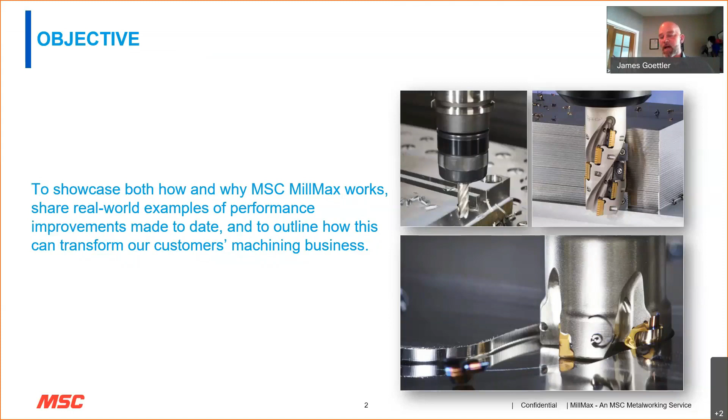So the objective, as I said, is to showcase just how and why MSC MillMax works. We're going to share some real-world examples of performance improvements, a couple of them individually, but also in aggregate, and outline how this is transforming businesses just like yours.

It's the ability to withstand pricing and margin compression, or to improve profitability of your business. So if you're more profitable, you can be more competitive because of your cost position. That allows you to withstand the pricing and margin compression maybe put on you by your customers, but it also allows you to potentially look to reshore supply chains from overseas, putting the U.S. in a position to have a more independent supply chain, as well as the overall profitability of your business.

The second thing is that businesses like yours want to grow year over year, and there are really two ways to do that in manufacturing. One is, if it's a machine shop, whether it's a job shop or a production shop, you can go buy more equipment. If you have the floor space and you have the capital, you can go buy more equipment, and by virtue of having more equipment, you can make more parts. Pretty simple. The other way to do it is to improve the productivity of your workforce, but also the capacity and how much you're running through these pieces of equipment.

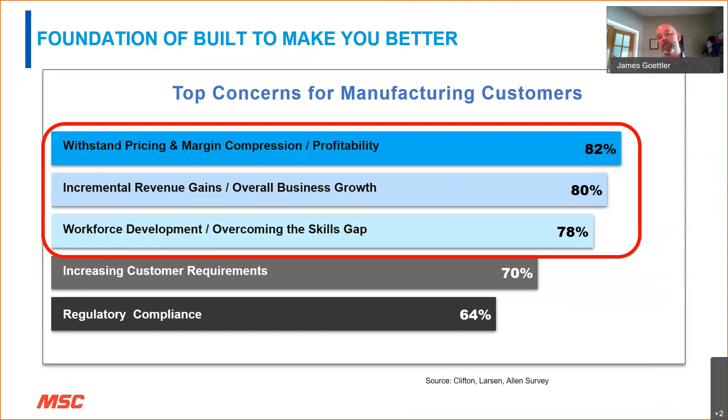So can we improve our profitability, our competitive nature as a machining business, and grow year on year, but do so in the face of this challenge of having skilled workers out there. So what we do at MSC is really focus on those things and try to find ways to help you in those regards. And the same thing falls in line here in the innovation team.

Those findings were released in this executive order, and the challenge was for manufacturing leadership in America to find a way to improve in these regards, through training and through technology and innovation.

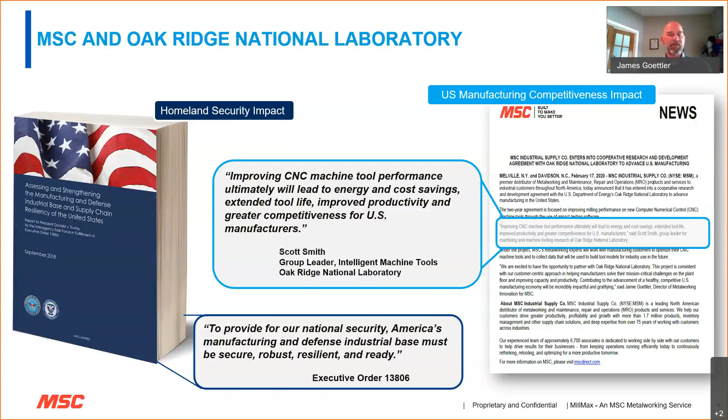Similarly, as I just outlined, for manufacturing businesses, those same things mean better parts, more accurate parts, overcoming the skills gap, using artificial intelligence, using Industry 4.0 endeavors, being more productive, and that also helps our customers become more prosperous and productive. So it's interesting that the same things we're trying to accomplish with MillMax have somewhat of a nationalistic endeavor in helping address that executive order, but also help our customers become better.

The relationship with Oak Ridge has been fruitful, and it'll continue to be for MSC and ultimately for our customers. You can read some of the details of it. It's a pretty interesting story. It was on the cover of Modern Machine Shop back in October of 2020. I invite you to read it. It's a really great story, and it outlines some of the things we'll share today and maybe even further details.

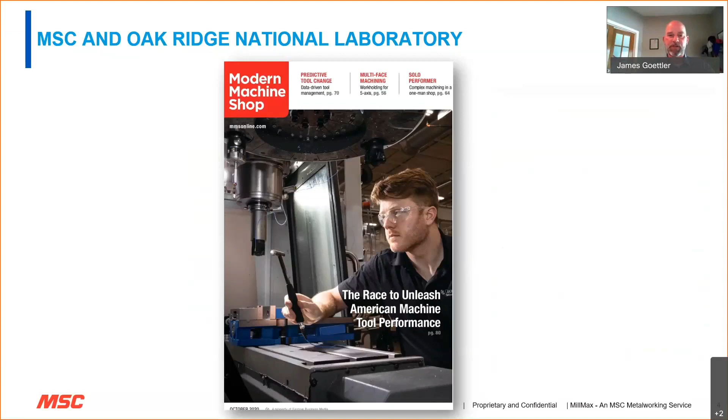So from a national and commercial strategy standpoint, some of the things we're seeing with MillMax are as follows. We're finding a higher material removal rate. Later in the presentation I'm going to share with you what some of those metrics look like, and they're pretty jaw-dropping metrics that MillMax is offering up in terms of these improvements.

Faster setup. We can include faster setup to mean less scrap, knowing instead of guessing in terms of your speeds and feeds and how you'll operate these milling tools on that piece of equipment for that particular material. And potentially programming too, knowing what cutting strategy - is it a full slot, is it a profile cut, is it ramping, is it trochoidal milling? It could be any of these different choices, and you'll know at the outset the ideal strategy. So faster setup is certainly within reason.

Greater capacity. We're finding significant cycle time reductions on average in all materials. Longer tool life is in a lot of cases a byproduct of us helping eliminate chatter from the milling operations you encounter. And as I said, that knowing, not guessing, is saving critical hours of getting more jobs on the machine and not scrapping parts.

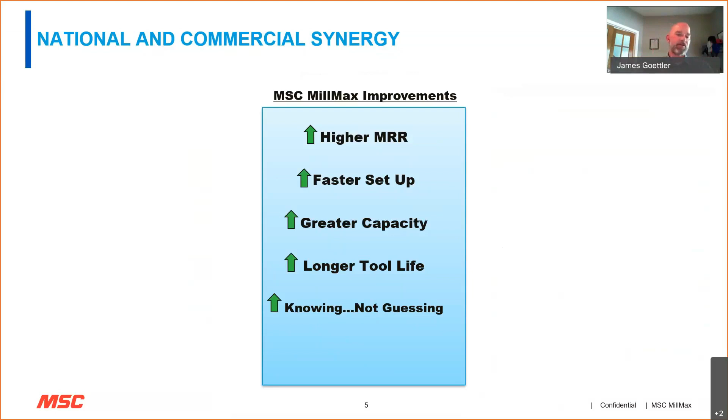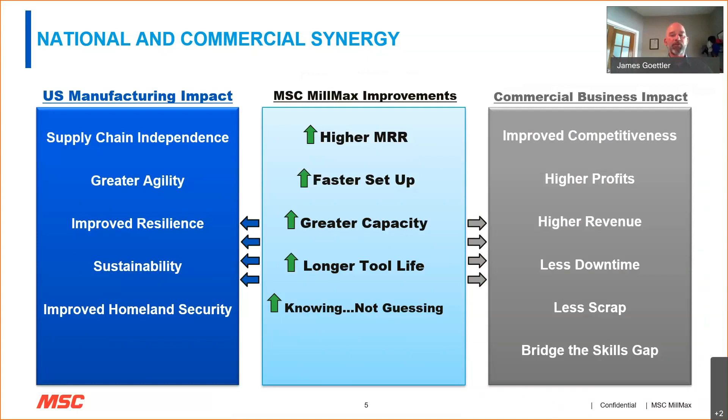So for that manufacturing impact for the United States: supply chain independence, greater agility, improved resilience, sustainability, lower energy usage, quite frankly if you're getting it right the first time, and improved homeland security. But those same things are also improving competitiveness, higher profits, higher revenue, less downtime, less scrap, bridging the skills gap. So that's why with MillMax, we couldn't be more proud to introduce this kind of product into United States businesses and to our customers.

So let's talk about chatter. MillMax is definitely in the business of dealing with situations where customers' operations either will be chattering or potentially are currently in a chatter situation. What we know is that vibration matters in any type of machining, but in milling more so, because the physics of milling would show you that a cutting tool or milling tool has multiple teeth.

Some are in the cut and some are not. Now drilling has multiple flutes, but they're all engaged all the time. In milling, that's not necessarily the case, and because of that you have deflection that happens - we're going to see that in a moment. But even if we just look at a spindle of your machine and tap that, and I'll show you how that works here in a moment with the MillMax video - if we were to tap just the spindle of your machine, of course it's going to vibrate a little bit, and you wouldn't be able to see it with the naked eye, but it can be detected.

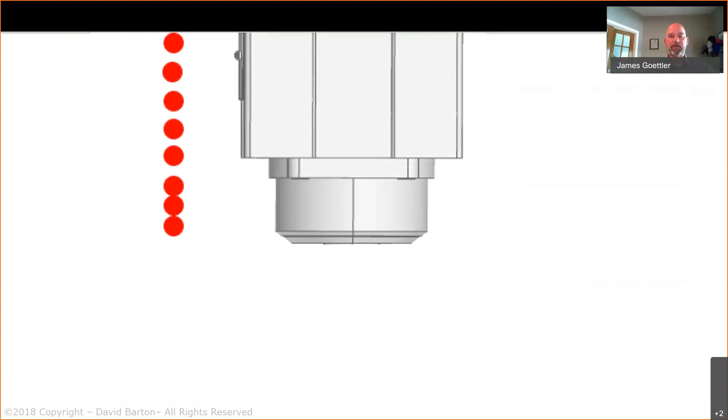You add a holder for an end mill or a face mill or a shell mill, and that would vibrate at a different frequency, but they're connected. So now you've got to deal with multiple frequencies happening. Now you add a cutting tool to the mix, and the ability for those things to find the stable speeds is very difficult. Today it requires trial and error, as I mentioned, in order to identify how this system of a spindle, a tool, and a tool holder wants to run in conjunction with one another. I use the analogy from time to time of a washing machine on a spin cycle.

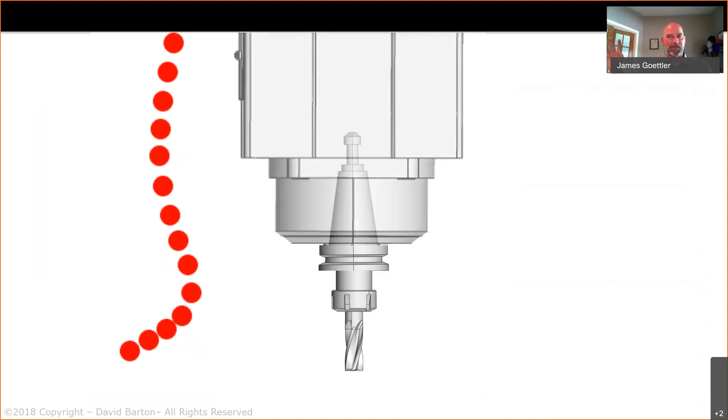Sometimes the load within the container is balanced, but you hear that rattling. It's essentially chatter, essentially vibration happening because it's not a stable speed at a certain RPM. But then it goes faster and faster, and it kind of goes away. Maybe a little bit faster, it seems to come back a little. You want to get up and go fix the washing machine, but then it ends up being fine. In a lot of cases, it's just like this milling setup, where some speeds are stable and some are not. Ceiling fans would be another example, or a rattle as you're driving your vehicle in some cases. Same kind of notion.

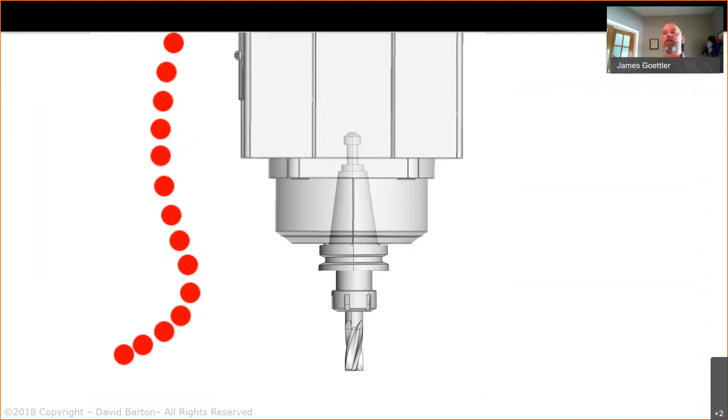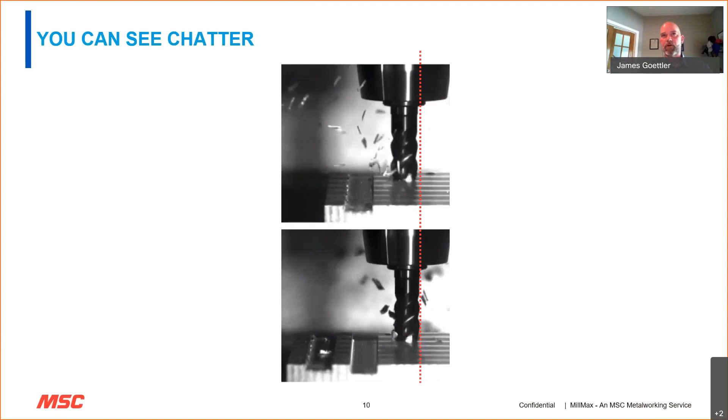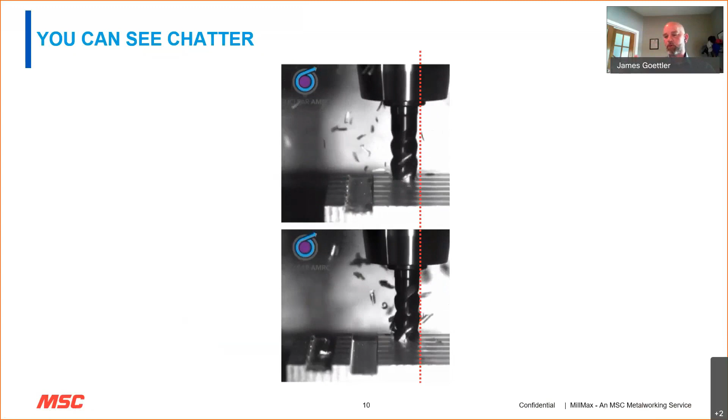As a result, you're going to have bad workpiece finishes, substandard tool life, and depending on how much of the spindle load is being taken on, it can run roughshod on the spindle and its life. The bottom one, shortly after being tapped using MSC MillMax, shows a much more stable cut, consistent chip formation, and that's what you want. With that being the case: longer tool life, better surface finishes, less scrap, less wear and tear on the machines, and in the overwhelming majority of cases, much faster.

Obviously, surface finish comes into play in a big way when it comes to chatter versus not chatter. Our ability to identify how to help you eliminate chatter from your milling operations plays a role in a significant amount of different improvements for your organization.

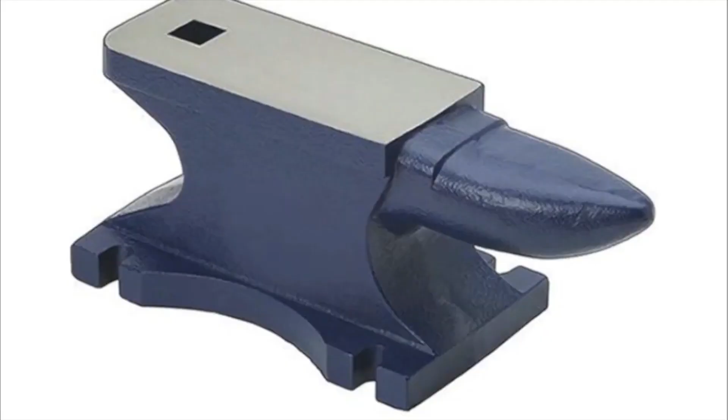We don't make milling machines, milling tools, or milling software. We just make them all mill better. Here's how. Unlike other machining operations, where the cutting edge never leaves the workpiece, milling has hundreds of individual tooth impacts per second, generating forces that cause deflection and vibrations. Like this 75-pound anvil, every tool is flexible and vibrates at its own unique frequency.

So right off the bat, we're showing you here what you can expect from a MillMax visit or consultation, as we call it. What you have here is what's called an instrumented hammer. There's a cable on the bottom side of that hammer that's attached to our metalworking specialist's laptop. This plastic tip on the hammer ensures there's no damage placed on the tool, and we're going to tap that tool strategically a few times in the X direction and a few times in the Y axis. The computer will tell us whether it captured and was able to measure the amount of pounds per square inch we struck that tool with. We're capturing the vibration of that system using this accelerometer, and you can see the cable there that's also attached to that same laptop.

While we're doing that, essentially what's happening is, if it's me applying this pressure to the tool, it's saying, okay, Jamie hits the tool this hard, and when he does, this system vibrates this much. And it allows us to identify through that vibration and measurement what are the stable speeds that this system, this tool, in this holder, looks like obviously a shrink fit holder, in this spindle of this machine, how do they want to run in conjunction with one another?

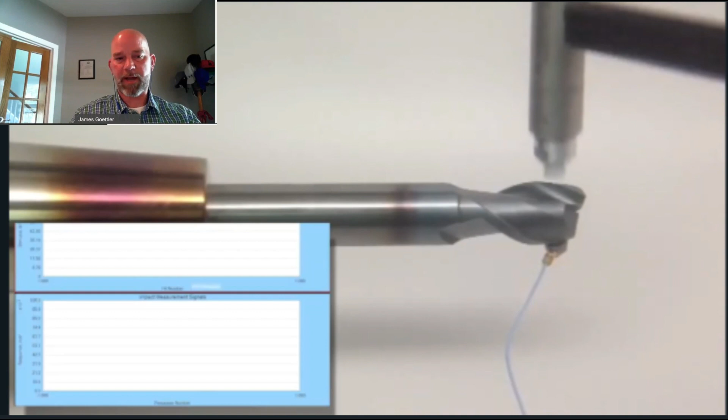Why is this important? The tool point deflects and rebounds at a frequency determined by the flexibility of the tool holder and spindle. You also have the tool impact frequency determined by the number of teeth and spindle speed. You have to get the timing of these two frequencies just right. If you do, each tooth is cutting equally, so tool life, productivity, and quality are maximized.

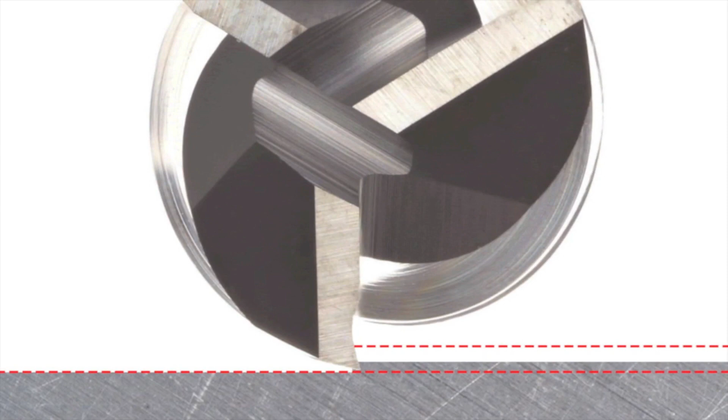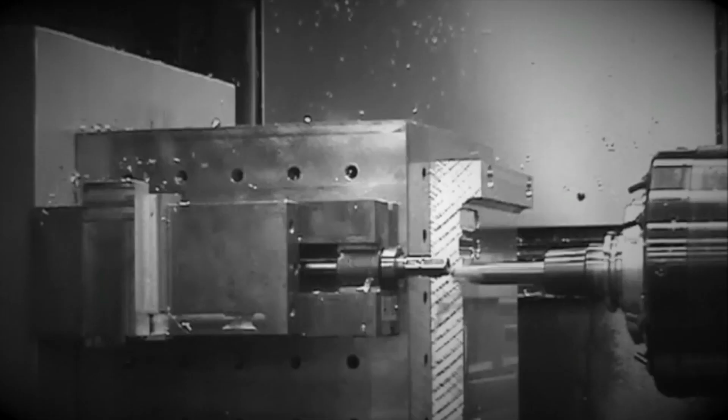If the timing is off, a tooth arrives too early, undercutting and throwing off the next tooth. It arrives too late, exceeding the programmed chip thickness, leading to premature tool failure, poor surface finishes, and possibly scrap. This timing mismatch keeps getting worse and leads to chatter.

Okay, so we've all heard that sound before. You don't want to hear that sound, but sometimes it's a reality, or sometimes that's what happens, and MillMax looks to help us avoid that, to help you avoid that.

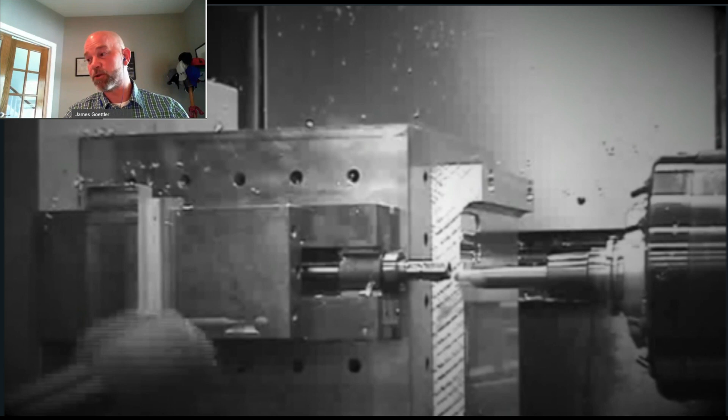I stop here, not because I need to show you what chatter is, but there's a microphone you can see, a larger microphone in the corner of the screen here. Part of the MillMax kit that our metalworking specialists carry with them allows us the opportunity where if you as a customer have existing chatter and you can see it in the surface finish or you can hear it, and we want to resolve it, we actually don't even need to stop the machine for that short amount of time to tap the tool.

Sometimes we can listen to it. And so we carry a much smaller microphone in our MillMax kits that allows us to listen to the chatter that exists in your piece of equipment with that particular operation. We listen to that for a given amount of time, 15 or 30 seconds, and then we add into the software some of the pertinent parameters.

What RPM were you spinning at that point? How many inches per minute were you feeding? What machine, RPM max, what material, a couple other bits of information. And just by virtue of listening to that sound file, we're able to tell you in a matter of seconds the stable RPMs that would help you fix that chatter or eliminate that chatter.

Taking it a step further, I'll share with you a little bit later when we talk about, it's called Harmonizer. We talk about this Harmonizer component of the MillMax kit, how at your facility, I know the pandemic is in many cases not allowing us to visit more customers and be on the shop floor.

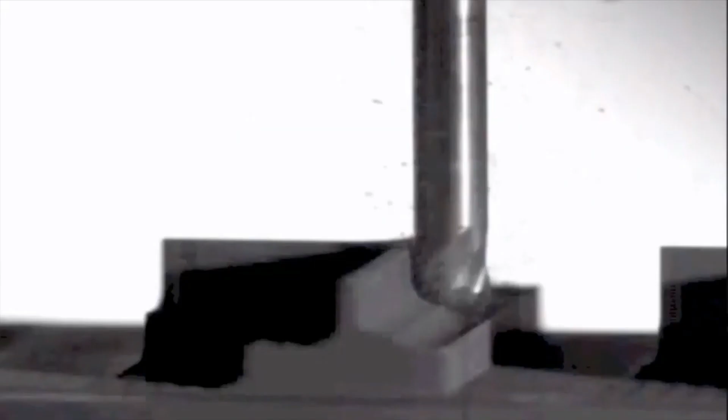Without knowing the tool's frequency, the common response to chatter is to slow down the spindle speed, vastly underutilizing the capabilities of your machine and tooling.

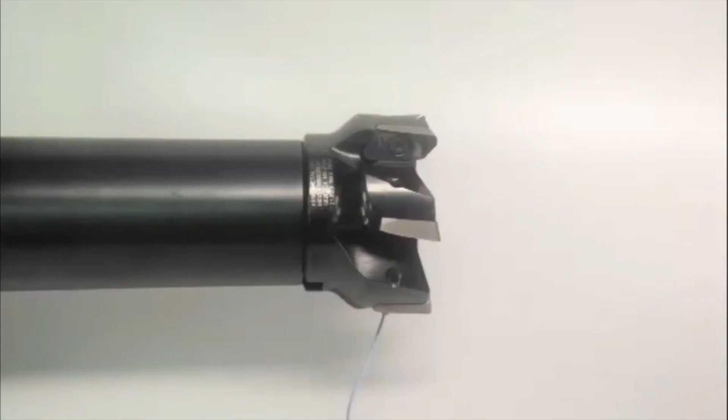Important to note here the range of sizes that we can use MillMax in your facility with the standard kit that our metalworking specialists carry, and there's 140 of these folks nationwide, by the way, we are nearby with the MillMax service and MillMax kit. 3/8 of an inch on the bottom side, up to 6 inch in diameter with the traditional kit that we carry with us.

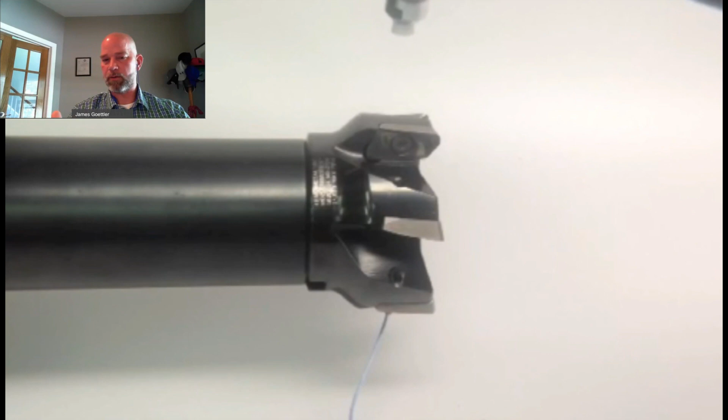And as you can see here, Indexable works just as well as it does with solid tools. As we said earlier, every different tool, tool holder, machine combination vibrates at its own unique frequency.

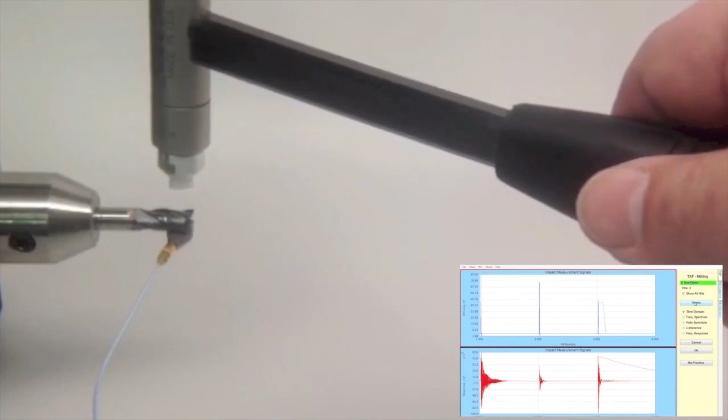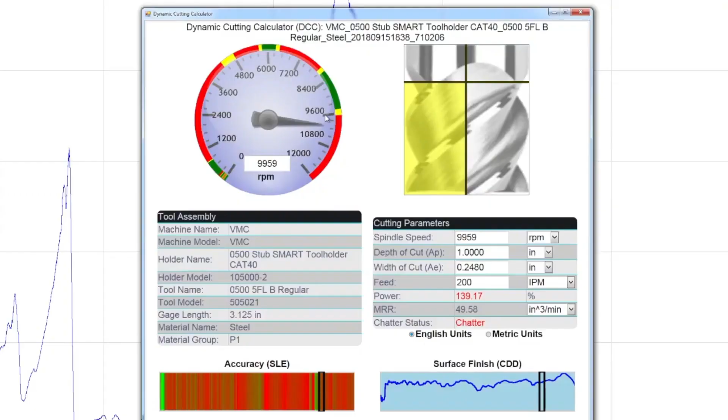The challenge is that there are billions of potential combinations. MSC MillMax measures the frequency of each tool and instantly generates a dashboard that calculates the precise stable speed, feed rate, width, and depth of cut for maximum performance.

It also determines the best speeds for surface finish and accuracy. You will always know where to run.

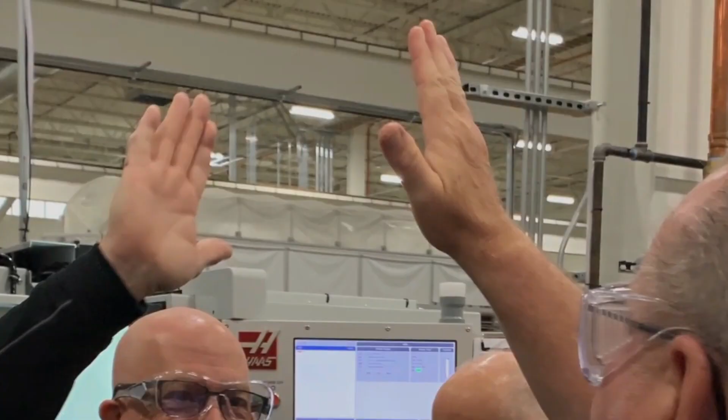Okay, so that's MillMax and how a MillMax test is administered. Ron, any comments or questions from the audience at this point? None so far, Jamie. None so far?

All right, folks, feel free to submit any questions or curiosities you might have regarding MillMax. So you should be able to see my PowerPoint again, Ron. All right? Yes, we can. All right, wonderful.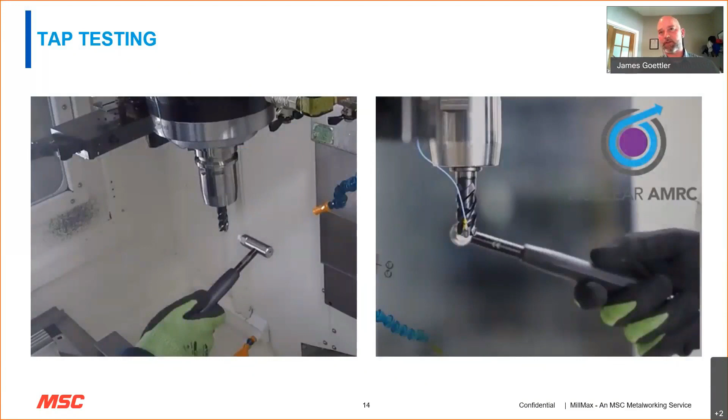There's a nice heavy fat area of stability that exists here, where most folks would not find that. I'll show you how that's difficult using traditional trial and error methods. But there's a multitude of stable areas where you're able to operate this tool.

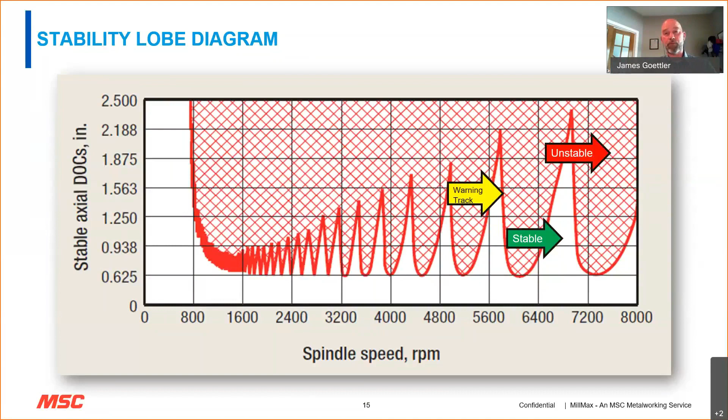Most times, what we find with customers is there's a lot of room for improvement. We take what's called a stability lobe diagram, that shows the safe areas to operate, the unstable areas to operate, and then what we call the warning track, which is some of this yellow.

That's kind of a warning that says, all right, you're going to start to hear a little bit of chatter and you're going to start to get some bad finishes. Red essentially means you're probably going to either create chatter or break this tool at some point soon.

This is the dashboard that we give to you as our customer after a MillMax test is administered, and it gives you all of the stable speeds that you can operate within.

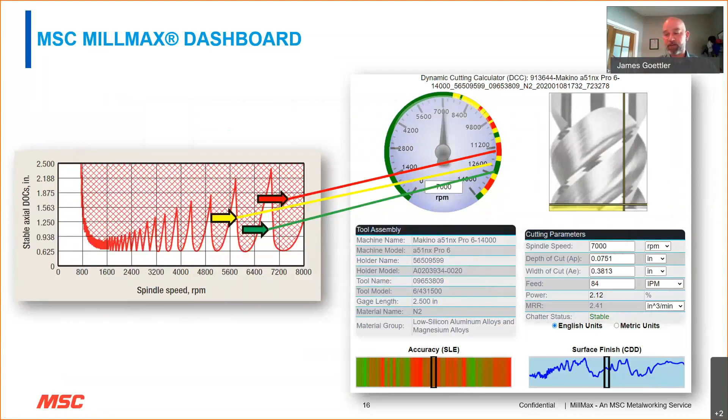In a moment, I'm going to show you a live dashboard, and this, what we call a slider, allows you to move the width of cut and depth of cut around. As we do that, you'll find that this dashboard refreshes itself instantaneously to say what you can and can't do with this tool in this machine for the material you're about to work with.

So let's take a quick look at that dashboard. I'll show you here. This is a real dashboard, as you can see, that we created for a customer of ours.

You can ask this dashboard how you might want to find different ways to machine this. In this case, it was aluminum in a Makino A51. Every machine's going to be a little bit different, and of course we have a unique holder here, and an end mill that we've identified.

But this is telling you how you can find the stable areas for machining, across a variety of different widths of cut and depths of cut. As you know from your machining practices in the past, the smaller width of cut and depth of cut you take, there's a multitude of RPMs you can operate when you're only taking that much of the cutter. But your material removal rate is somewhat small here.

So is that machine capable of taking more? A larger width of cut, a larger depth of cut. Your machine is identified here uniquely.

This is not a cookie cutter dashboard. If your machine had 10,000 RPMs, the max on this tachometer would show 10,000. This particular piece of equipment had 14,000.

So if we said, hey, we're doing some roughing, we want to find a stable area that's going to really remove some material. You can see here that our material removal rate was over 4.

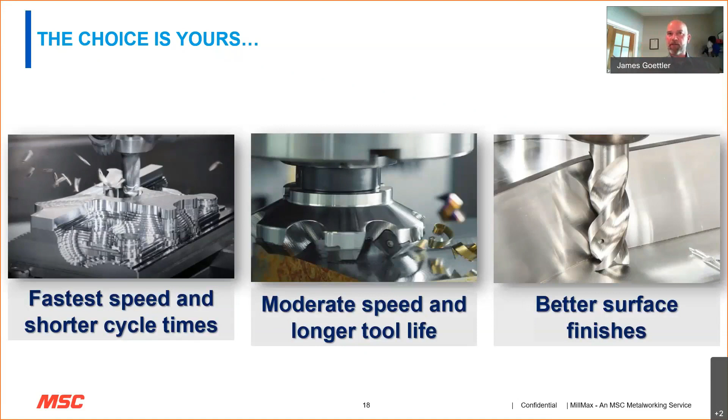Or you can go a little bit less speed and improve your tool life. Or you can elect to go with just a better surface finish. So the choice is yours, and all of that information is available to you in real time on the dashboard that we provide to you.

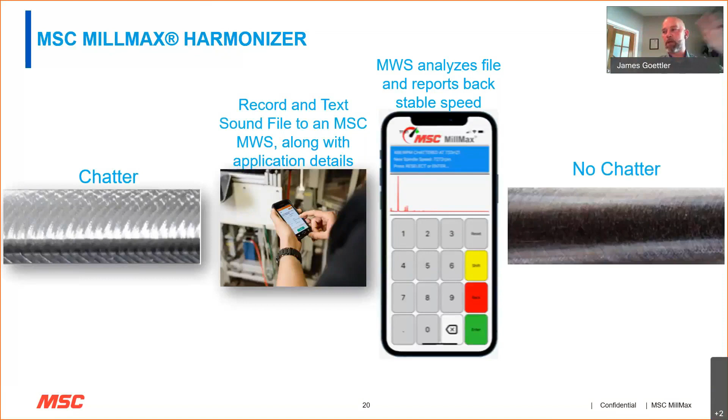We talked about Harmonizer before, and the fact that we're able to take a sound file, this is what it looks like on our cell phones. When we listen to that chatter that exists in your equipment, whether we're doing that on site or through a text or an email of a sound file, we're able to get back to you quickly with the response to help resolve that.

Hey, Jamie, we have a question. Sure. Can the dashboard tell you what the optimal parameters are to maximize metal removal rate? Answer is absolutely it can.

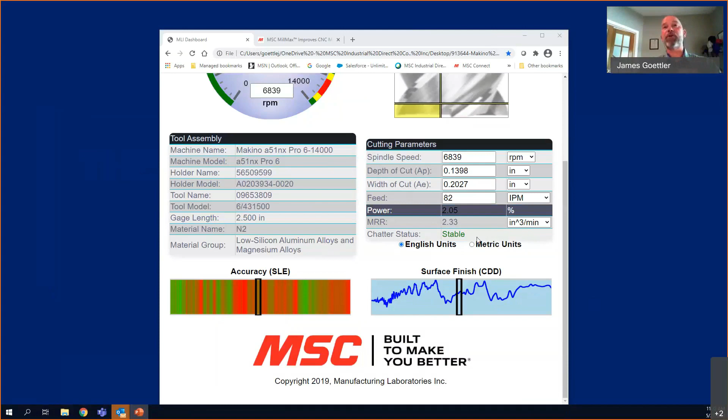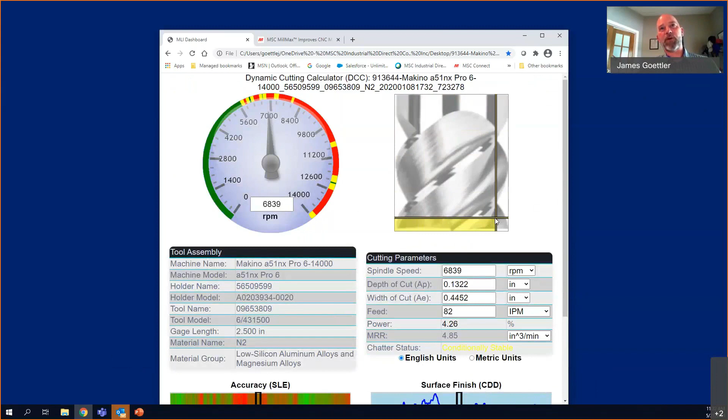It will take, it's not going to tell you outright at this point in the software version that we've created. But what you would need to do is just monitor that. So right now, let's go to a stable area first. Let's keep an eye on this. We got a 2.1 here in a stable area at 7,000 RPMs. This is where your determination of a cutting strategy can come into play, finding a stable area where you're removing the most material.

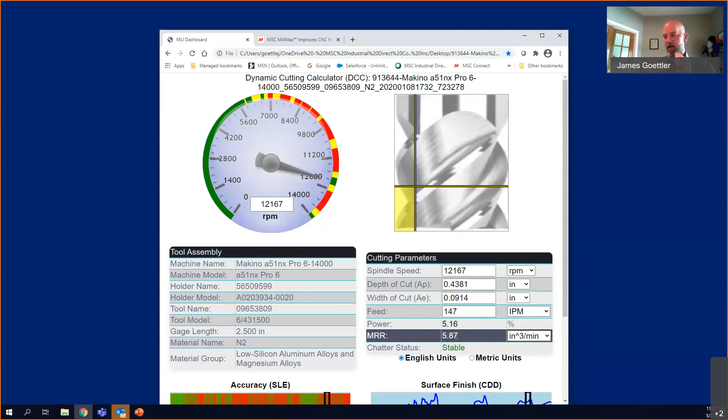Let me find a higher one. So we're opening up a stable area here. Let's move the speedometer or tachometer here, and you can see where it sits. It's through that kind of interaction with the dashboard that you can find it. But as of now, it's not, hey, click here to see what the top MRR is. You need to kind of locate that using the cutting strategy that you're comfortable with. But the answer is yes, you can do it. It's just working with you and the dashboard together to make that happen.

It's a really good question, and potentially something we look to add to our dashboards in the future is show me the max MRR that's possible. Good question. Any other questions, Ron?

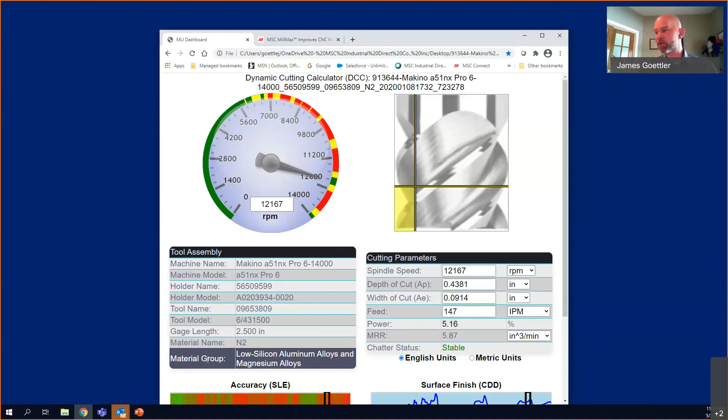That's it right now, Jamie. Okay, all right, that was a good one. I haven't had that one before. I like that, and hopefully we have who asked that question, so I'd love to follow up with them when we get that.

So, aggregated results from our MillMax testing. You can see here, folks, that the numbers really are, as I outlined before, jaw-dropping in nature.

So machine speed, we like to talk about the machine speed or the RPMs on the spindle and say, listen, RPMs isn't what necessarily is putting parts out the door. It's material removal rate more so. We'll talk about that in a second.

The reason we put this on here is we're basically doubling, on average, the RPMs that our customers are spinning the tools when they use them. Why is that important? Well, maybe you bought a machine with 20, 30, 40, or 50,000 RPMs and you're not using them. Getting up to those higher speeds can be intimidating sometimes. MillMax will let you know what that machine is capable of doing for the material you're about to machine.

On average, we're at the point, folks, where we're hundreds of tests in all different materials, anything from aluminum to super alloys to stainlesses, to harder materials, softer materials. These are all averages across production environments and job shop environments. On average, if a customer is at 3,000 RPMs with an existing operation, when we walk out, you're at 6,000, basically, is what we're seeing.

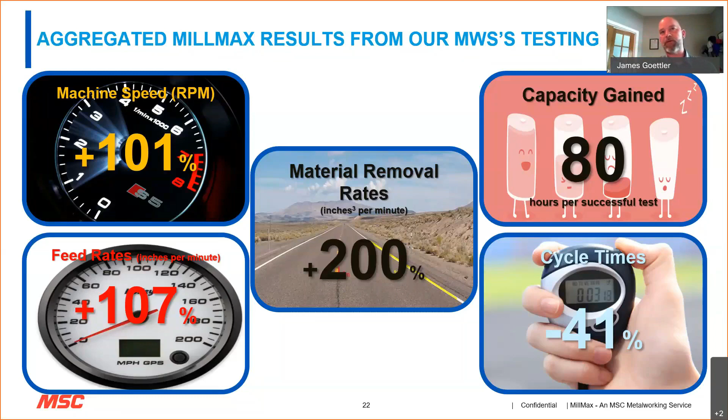What that does is allow you to add more work to that piece of equipment. More work means more revenue. More revenue means more profit, and without adding new equipment. So there's a lot of really great benefits to these results that we're seeing on average with MillMax.

There's a slew of other potential benefits. I created a new slide I'll introduce in a couple slides that'll outline this more specifically with the recent test that happened here. But you can see here some other things we don't necessarily document in terms of cost avoidance or cost savings. You didn't have to go buy more equipment to grow your business, because we're showing you these capacity gains potentially, and equipment wear and tear.

Because we know that we're operating the spindles in these critical milling operations where chatter causes issues longer term with the performance and the sanctity of that spindle, you're not going to have that as much. So your spindles and your machines will last longer.

Post-operation process elimination. With the dashboard, we're able to tell you how you can maximize your surface finish using this tool and this material. And if that finish is good enough, you can potentially eliminate a process afterwards of buffing or otherwise to get the finish that you desired.

Additional product savings. So if you were indeed buffing or somehow polishing, you could eliminate those products in some cases, not every case, but in some cases. In a lot of cases we have cutting tool expense reduction, so you're going to use less cutting tools, because if they're not chattering, then they're going to last longer.

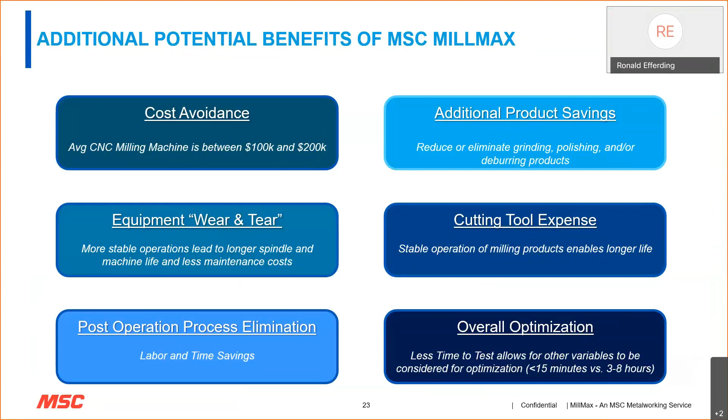If you go back to that dashboard, it'd be easy to answer this one. Is there a machine tool database that supports the dashboards? Absolutely. So we can go ahead. I thought maybe the machine model would show that, Jamie. This here? Yep, absolutely. So we have a database of hundreds and hundreds of the top makes and models of machines that exist in the marketplace.

Let me start. There's going to be two ways to look at this. That's a really great question once again. So we know the RPMs, the horsepower, the torque rating and torque curve of a variety of Makinos, Haas's, Okumas, Mazaks, and so on and so forth.

Sometimes you have a custom piece of equipment. Of course it wouldn't be in our dashboard, so we would inquire with you: what's the horsepower, can you get me access to the torque rating for this thing, what's the max RPMs that you have. A couple bits of information we can manually add in, so this isn't relegated only to standard makes and models that exist in the marketplace. You might be running an RTM that's completely unique and has a fixed RPM, and we can deal with that separately. But all of that is available for us to really make this dashboard precisely and uniquely customized for your equipment. It's a good question.

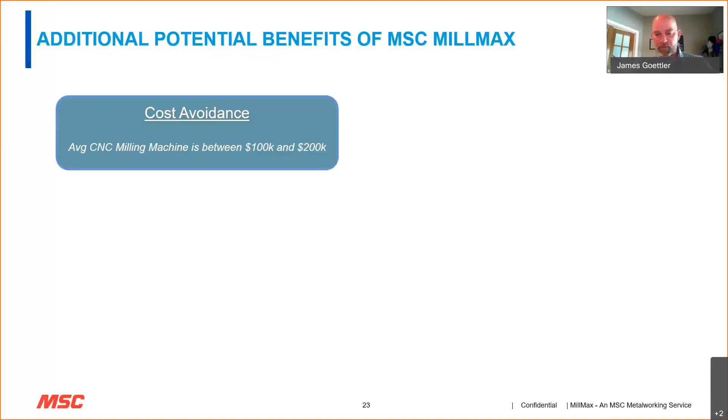Here, we'll go back to this slide here. We're good, we'll have some time for questions at the end. This is what you can expect, folks, from documentation of your test. In this particular case, you see a $9,300 profit improvement for this customer.

What we'll do is line up your current state. What was the case when we got there, if it was an existing job? And then what we found after using MillMax that you were able to do in a more stable, faster, successful operating parameters. We'll compare that and hand this to you to say, by virtue of this 15-minute test, if you have to make this many of these parts, then you're going to improve your profitability by about $9,300 just from this short test, just by using MillMax.

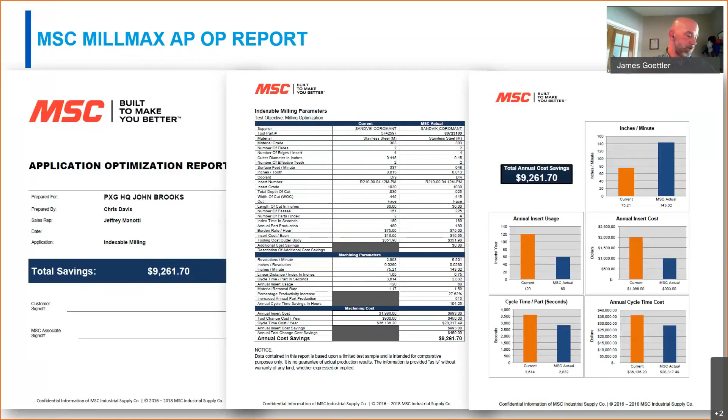Here's a smattering of different successes in a variety of different ways that we're looking at them. The color coding on these ones is ISO reference: blue is steel, yellow is stainless, red is cast iron, green is non-ferrous, and brown is super alloys. The purpose of this slide, folks, is that sometimes with tap testing, people believe it's really good for aluminum, but maybe not for other materials.

And I'm here to tell you that our testing in any material is showing success out there. So if you're machining compacted graphite iron, or 316 stainless, or 416 stainless, and you're considering optimization of how you're operating milling tools in your facility, let us know. Let us get involved, do a demonstration, and help. We'll talk about the process and next steps here in a moment.

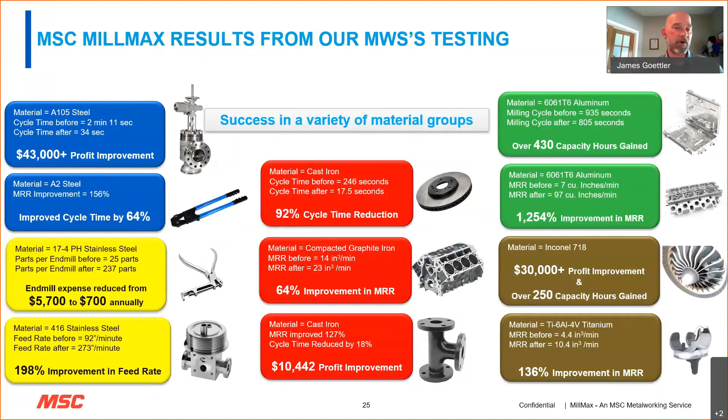You can see that the improvements we're witnessing are pretty enormous. I really like this compacted graphite iron one, or CGI as some call it, because at a truck engine manufacturer there's runoff after runoff and so many tool trials done before this goes into production. We showed up and talked about MillMax with this business, sharing what the possibilities were and what we were seeing out there. They were certain there wasn't going to be much room, if any, for improvement. In less than 15 minutes, we were able to improve their material removal rate by 64%, just with that simple tap test. They were blown away. What we found was a whole other stable zone at a higher RPM and ultimately a higher feed rate, as you can tell. Great results across the board.

This is the one I was mentioning a moment ago. Going to take a stab at this. When we deliver products or services to the marketplace, what's the total value proposition potentially for a customer? In this particular case, I'm in Pittsburgh - this actually happened in Pittsburgh. Jason Beatty is our metalworking specialist here. He was actually on the cover, ironically enough, of the webinar pamphlet that you got.

Jason ran this MillMax test within the last week or two, in 4140, not a huge run - 50 parts the customer had to machine. When Jason showed up, the customer was running a 4-flute tool with 367 surface feet. You can see some of the metrics: the tool was a $162 end mill, their material removal rate was slightly under 4 cubic inches a minute, their feed rate, and they were getting about half a part per end mill with this large pocketing operation. The cycle time cost of the milling itself - how much it cost that customer to operate this end mill on this part, with cycle time and everything involved - was about $52,000, slightly above that.

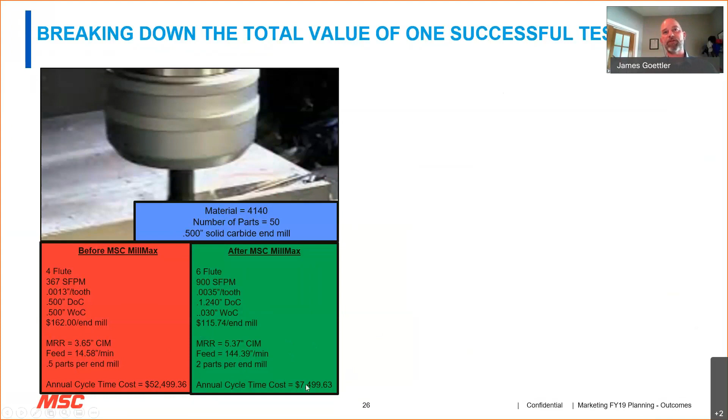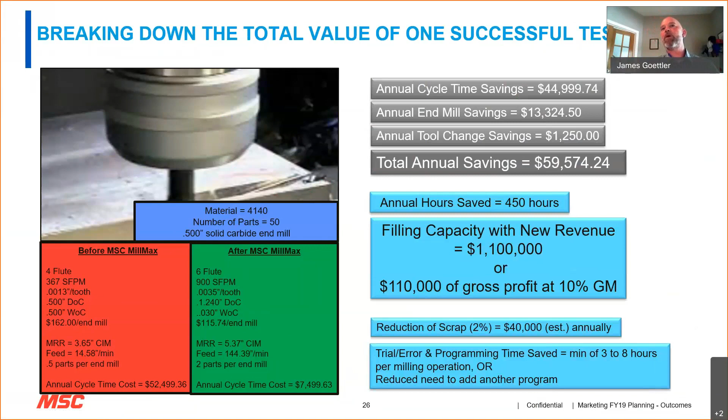We came in and tapped a different tool that Jason recommended. The idea is that we're going to introduce what we believe would be a better tool for the operation, in some cases a better tool holder, because we're getting smarter over time by applying this technology. Jason introduced a 6-flute tool, 900 surface feet, 3.5 thou per tooth. We took the material removal rate from 3.65 to 5.37, the feed rate from 15 inches a minute to 144 inches a minute, and got 2 parts per tool. The cycle time cost, because we were able to do it so much faster, went from 52,000 down to 7,500. That total cost savings - essentially what any of our customers, including you folks on the phone, would accept - is putting $59,000 of improved profit in our pockets because I'm able to make these so much shorter based on your burden rate. There was $13,000 less in end mill spend associated with this, and tool change savings from having to change tools less often. It gained 450 hours of capacity on these machines, or allowed them to add that much time.

This is a large work piece. But actually, if I take a shop - and I just use some ballpark numbers, yours may be higher or may be lower as a business, but work with me on this one - let's say a $5 million shop in terms of revenue.

If you divide that by 253 days, let's say they're running 5 days a week traditionally, running one 8-hour shift - so 9 hours, but with lunch we'll call it an 8-hour shift - their average revenue per hour is about $2,500. If we give back 450 hours and you apply new work to that, that potentially is $1.1 million of new revenue that could be added.

We don't take credit for this, we don't call this out traditionally, but what you're going to do with that 450 hours is up to you. It could be a new source of revenue, a different customer, another job, right? And again, without buying new equipment. If you're making 10% profit margin on that particular work, that's $110,000 of improved profit, all because of a simple tap test on a milling cutter.

Again, these are noteworthy things that we'll share. We're not going to claim them as cost savings because you might use that time for training unskilled associates. You might use part of that time - that's up to you, but we're showcasing that that's available.

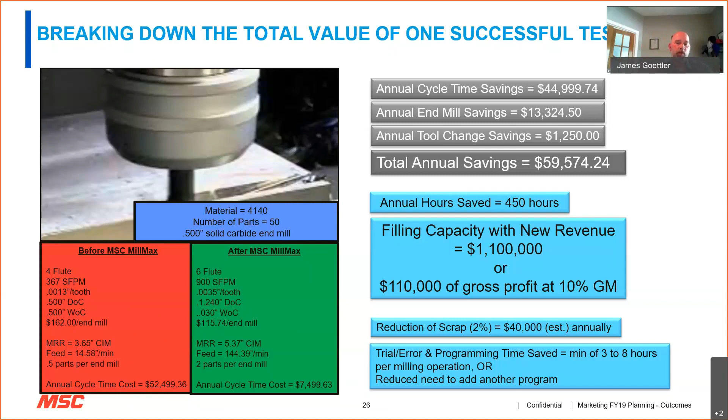You might find the difficulty right now is finding programmers. If you want to grow your business, you might need to add another programmer. If we're able to help on the milling side with finding those applicable and optimal speeds and feeds quickly, allowing you to consider a full slot versus trochoidal versus plunge versus any of these other things, that can really help a business with an overall value proposition - again, all steeped in MillMax.

So, Ron, is there a question? Well, we actually have two, Jamie.

The first one is, can you use MillMax to tap live tooling on a lathe? I'll let you answer that one because I know you know that one. The answer is yes, you can.

Absolutely. So what we tell customers - and whoever asked it, again, is a great question - what we're seeing in the American machine tool marketplace is a real leap in mill-turn and multi-spindle type machines because of their flexibility and capability. So we expect to see more and more need to tap the spindles of live tooling and those types of machines. What I'd tell you is sometimes there's a little bit less horsepower on those spindles, sometimes a little bit less RPMs than we'd see in a traditional vertical or horizontal machining center.

The improvements - we can absolutely optimize them. They're probably not going to be as significant as you would find in a traditional milling machine, but they absolutely are perfect candidates for optimization nonetheless.

Jamie, this next one goes back to the machine tool database. Is the relevant information provided for each machine only the RPM and spindle taper, or are there other variables for each machine's design in the algorithm?

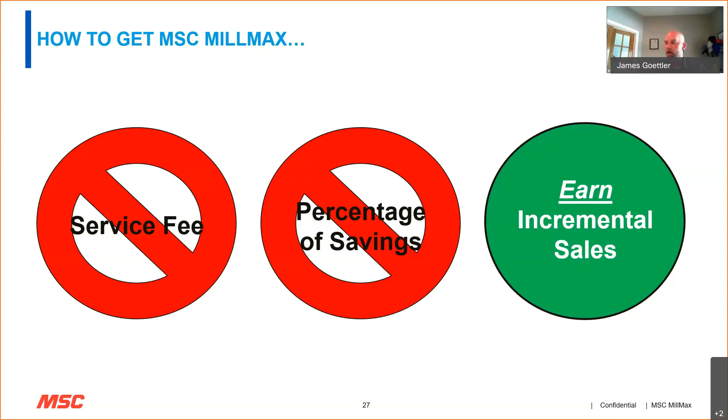So we went back to the original basics of doing business and said, we just want to earn your business. What we do is ask for incremental sales, stuff that you already buy, but you may buy from somebody else, a competitor of ours, and say, look, we want to become your end mill supplier, or your tool holder supplier, or your fluid supplier, or your face masks or gloves, and any of those kinds of things. If our price is commensurate with what you're paying for those items, transitioning that business to MSC doesn't cost you anything more, and you get access to MillMax. That has really been applauded by our customer base, and that's the way we do that.

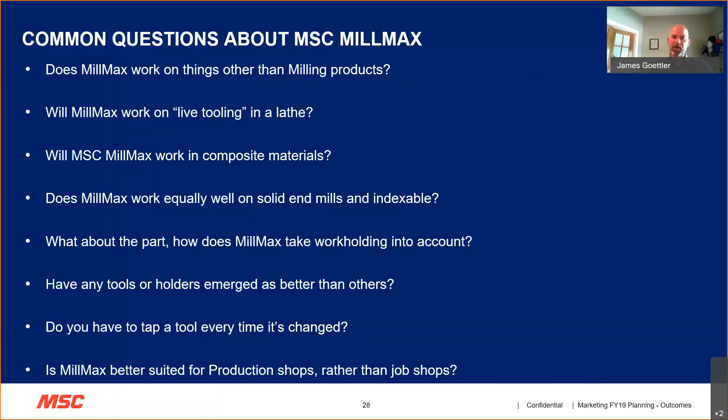I'd argue it's potentially even more so. If you're doing a few pieces, knowing in advance exactly how to program this with MillMax means you're not making scrap. I was reading Modern Machine Shop this morning, and job shop scrap rate can average somewhere in the 10 to 15% range. Imagine if you could significantly limit that - all that time, energy, and cost of raw material saved. If you're using MillMax and the service, you're going to have less scrap and higher speeds, which means more jobs. So for job shops, it's just as critical.